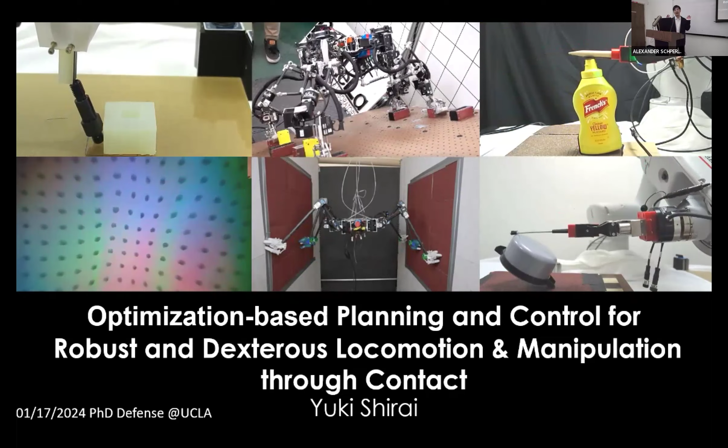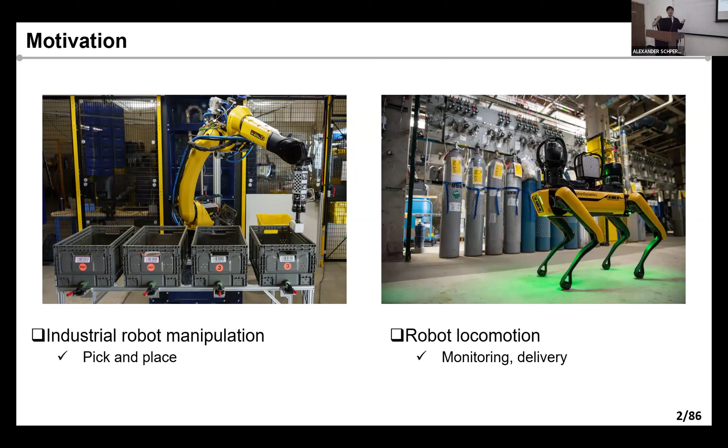Okay. So let me first get started with the motivation. Nowadays robotic manipulation has shown impressive results. For example, robotic manipulation has been used for simple tasks such as pick and place in highly structured environments such as factories. Also, robots such as Spot from Boston Dynamics have shown remarkable capability in locomotion tasks such as monitoring, delivery, and inspection. Although those robots have shown impressive results, I would say current manipulation and locomotion algorithms are still very insufficient in performance. Robotic manipulation can do great work in simple pick and place tasks, but in highly structured environments such as factories, where planner, estimator, and controller are all guaranteed to succeed. I think we want to do a bit more.

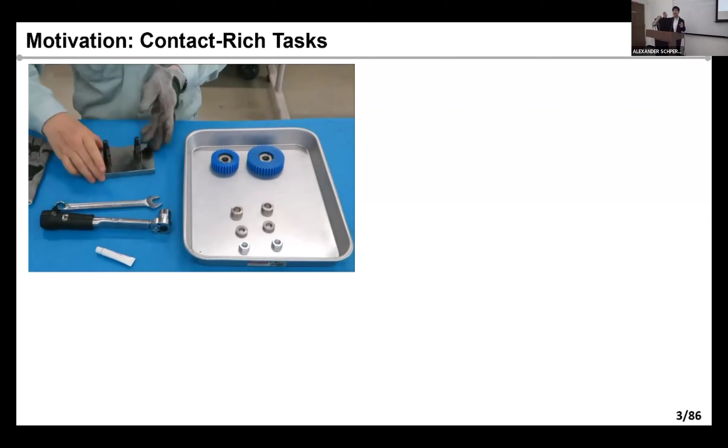In fact, we humans can achieve very dexterous tasks through contact, even under uncertainty. Here I'm showing one example of bimanual assembly of a gearbox. He understands which arm he's going to use, which arm grasps the tool, how much force he needs to apply, and what kind of motion he needs to assemble the gearbox, which is a very contact-rich task. Similarly, I cannot do free climbing, but some people can, where he understands when to make contact, when to break contact, and how much force he needs to apply to the environment to accomplish the climbing task.

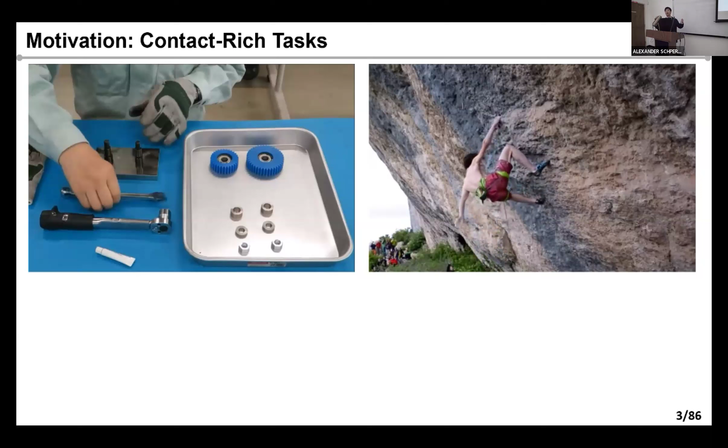What I'm trying to say here is that we humans can do very, very complex tasks through contact. And my research motivation during my PhD is: can we make robots perform very dexterous tasks as we humans can do? But of course, there are many challenges. First, planning through contact is already quite challenging.

In planning without considering contact, the contact mode sequence, such as when to make contact and when to lose contact, is fixed. It's given by users. And the optimizer is able to just focus on designing a continuous trajectory of the robot, such as the leg trajectory or body trajectory of the robot. As a result, the optimizer can potentially find a solution efficiently.

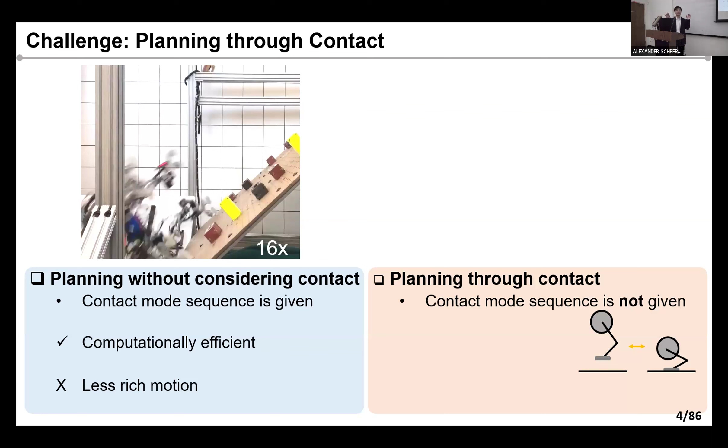In contrast, in planning through contact, the contact mode sequence, such as when to make contact and when to break contact, is not given by users. And thus the optimizer needs to figure out the appropriate contact sequence to complete its desired task. If somehow the optimizer can figure out the optimal contact sequence and we command the trajectory on the hardware, since the optimizer could successfully consider the appropriate contact dynamics, the robot can successfully achieve the climbing task for this specific demo.

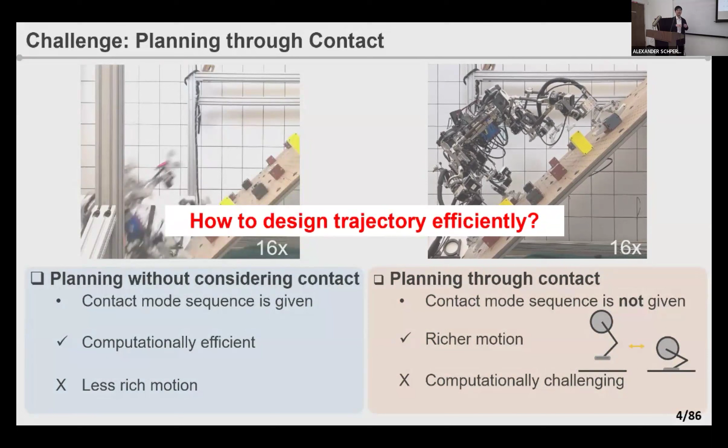Of course, there are some challenges. The key challenge is, in order to make the optimizer consider the change of contact, you often consider mixed integer constraints or complementarity constraints if you use a trajectory optimization framework. That dramatically increases the computational complexity once you have too many contacts. So the key question is how to deal with those complicated constraints, even if you have many contacts.

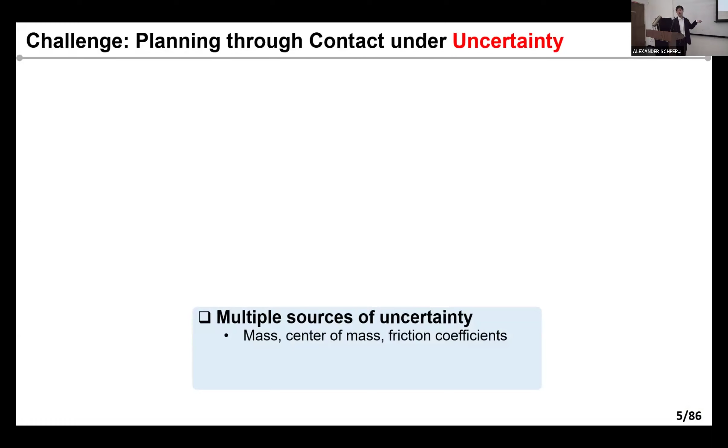Another challenge arises from uncertainty, right? In reality, uncertainty always exists, such as mass and friction of the object during manipulation. Here we want to do pivoting manipulation, where we want to reorient the object by 90 degrees. But since we couldn't do good system identification of the coefficient of friction between the object and the environment, the object loses contact. Similarly, again, because we couldn't do good system ID, the robot loses contact.

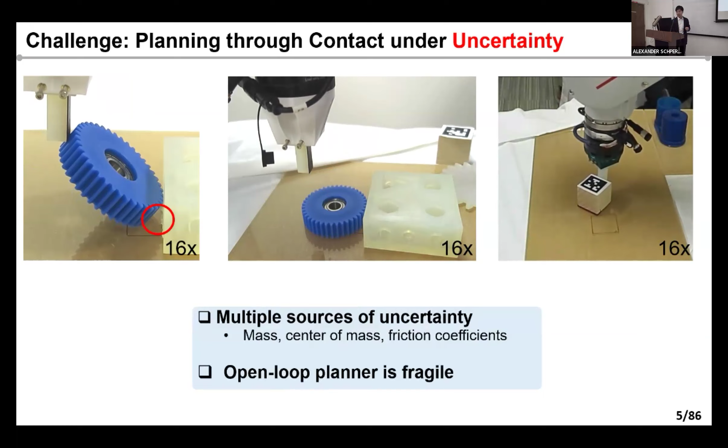Here we are trying to do pushing manipulation, where we want to bring the object from the start state to the goal state. However, even though we use a very good robot manipulator with very good position control accuracy, the robot still could not bring the object to its desired state, because we have very complicated friction dynamics between the object and the environment. So the key question is, how can we design robust optimization such that the designed trajectory will be robust against physical parameters such as mass, friction, stuff like that?

What's more, once you have too much uncertainty, maybe just using robust optimization might not be enough. And thus a closed-loop controller will be very beneficial. However, designing a closed-loop controller for a contact-rich system is in general very challenging. Here, we showcase our closed-loop controller for a tool manipulation task.

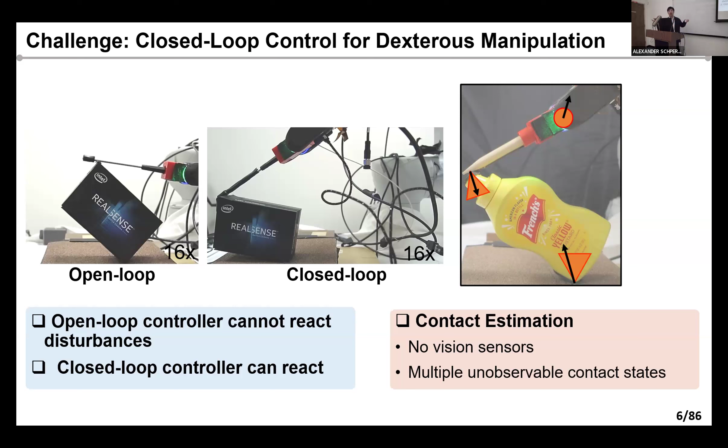We don't use any vision sensors, so we cannot estimate the pose of the object. However, even if we use vision sensors, in order to do closed-loop control, you still want to guess if contact is sticking or slipping. You also want to know how much force is happening at each contact to regulate the whole tool manipulation task. So the key question is how to estimate those contact states for this kind of complicated contact system.

So with those motivations, through my PhD, I have been focusing on those two axes. The y-axis, or vertical axis, considers whether my framework uses open-loop control or closed-loop control. When I say closed-loop control, I mean like MPC, model predictive control. My framework uses sensor measurements to replan the trajectory. In open loop, I don't replan the trajectory.

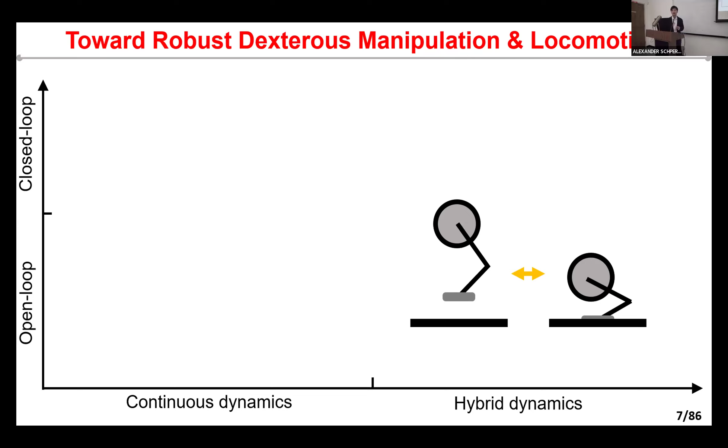The x-axis considers whether the framework considers hybrid contact dynamics or not. Hybrid contact dynamics means the framework allows the system to change contact mode. In other words, in continuous dynamics, I assume the contact mode sequence is fixed during locomotion and manipulation.

Based on those two axes, I can categorize my previous works into 4 sub-blocks. For example, I have been working on chance-constrained optimization for a vertical wall climbing robot. I also did some tool manipulation work for closed-loop control. Nowadays, I've been focusing more on hybrid optimization, considering robustness or performance for very contact-rich tasks.

Today, I don't have time to talk about one of the stochastic optimization projects I did during my PhD, but if you are interested, I'm very happy to talk offline. We did some stochastic optimization for designing feedforward and feedback gains for contact-rich systems under chance constraints. But today I would like to focus on those 3 projects.

First, I'm going to talk about our proposed distributed optimization technique so that the robot can efficiently design trajectories with multiple complicated contact constraints.

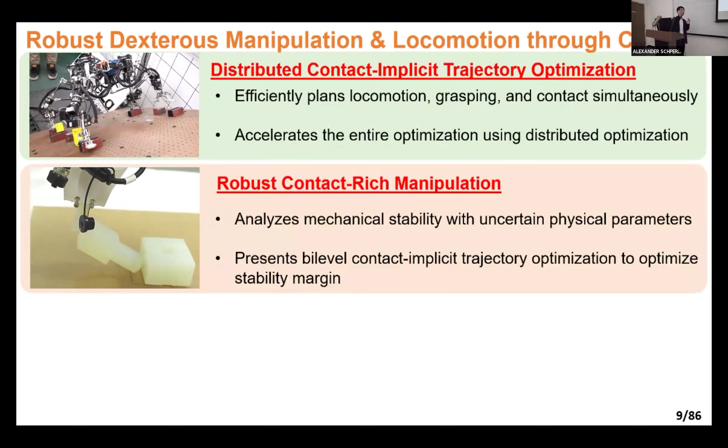Second, I'm gonna talk about our novel bilevel contact-implicit trajectory optimization, which can design an optimal controller for pivoting manipulation, as you can see, while simultaneously optimizing the worst-case stability margin during pivoting, so that the robot can do very, very robust manipulation. And finally, I'm gonna talk about our closed-loop controller using a visual tactile sensor, which is GelSlim.

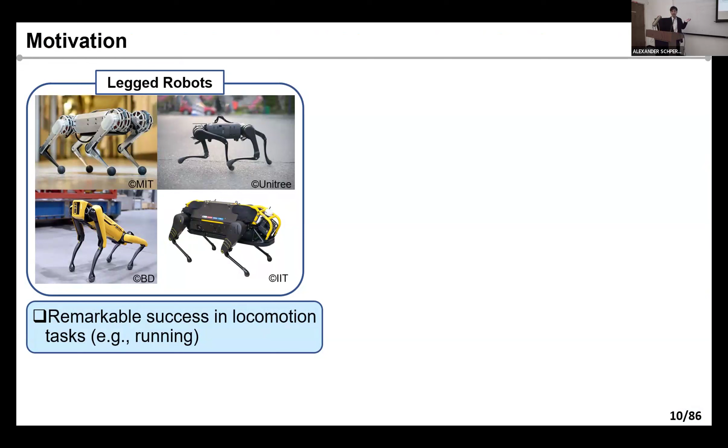Okay. So let me get started with the first chapter of this dissertation, which is planning through contact. So just for recap, legged robots have shown impressive results. What I'm trying to say here is we want to do a bit more. In order to accomplish more complicated tasks, which traditional legged robots cannot accomplish, we need to additionally consider those complicated constraints.

In this chapter, actually, we're gonna focus on the free climbing task. Although all the algorithms I'm gonna talk about today can be applied to other locomotion and manipulation tasks, here I'm gonna use our algorithm for the free climbing task because this is a challenging application.

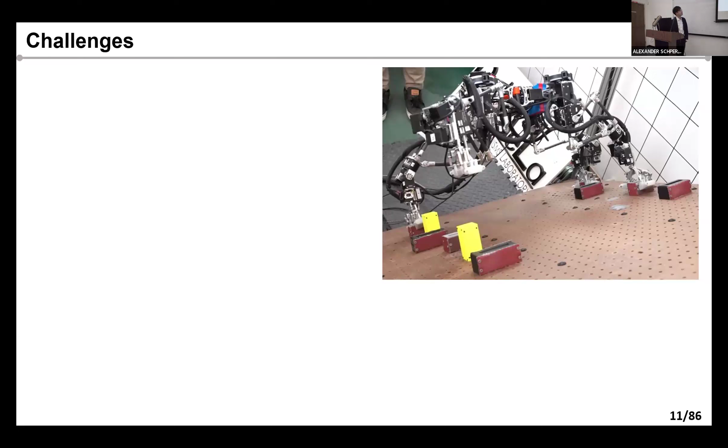So first, why is this problem challenging? Why is designing a trajectory for this free climbing robot challenging? If you use trajectory optimization, you're gonna have many different complicated constraints. For example, you need to consider dynamics and kinematics constraints of the robot, which would be nonlinear constraints because you have a bunch of sine, cosine stuff, right?

Because for this free climbing task, it's not trivial what the right optimal contact sequence is before we do climbing. So we ideally want to optimize that to figure out the right optimal contact sequence, which makes the optimizer use integer constraints to consider those discrete decisions.

Another challenge arises from the scale of the optimization problem, right? Our lab has been working on legged robots, but this is not like a traditional legged robot. We have 4 legs where each leg consists of 6 DOF, so we need to consider position and orientation of the end effector. And each leg has a 2-finger gripper, so that also introduces additional dexterity or complexity.

Also, the environment is not flat terrain, right? The environment consists of boxes for the robot to grasp for climbing. That also introduces additional complexity. So the optimization problem is very large scale with many integer constraints. So how do we design the trajectory efficiently?

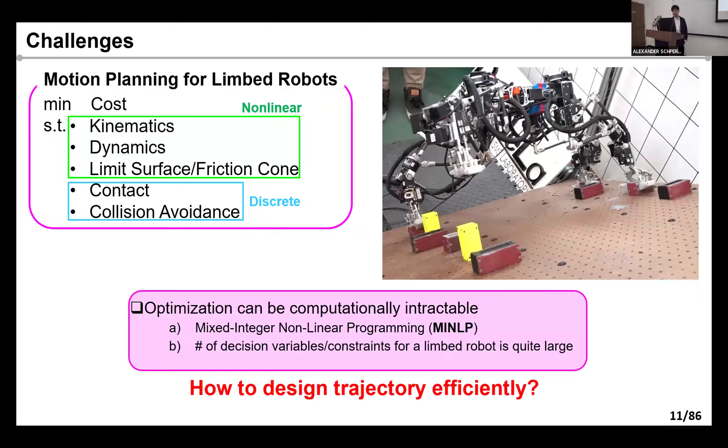Okay, so the problem statement is as follows. We want to design the optimal trajectory of finger and body pose, contact force, and contact sequence simultaneously. And we have some assumptions. For example, the robot is equipped with a 2-finger gripper, although we can consider a 3-finger or 4-finger gripper; that will just increase the complexity of the problem. And we assume that the environment consists of rigid and static convex holds. So we don't assume that those convex holds will move during locomotion.

Okay, so let me actually describe our problem formulation. This is our trajectory optimization. We have a bunch of decision variables. X is the state of the system. U is the control input for the robot. We have Z, which indicates the integer variable. And for each time step, you need to consider many different complicated constraints, right?

So first, we need to consider the dynamics of the robot. This is basically Newton's second law, right? F = ma. So we consider linear dynamics and angular dynamics of the robot to maintain stability. We consider contact force, contact moment, body position, and finger position to formulate these dynamics constraints, and angular velocity of the body. I don't think I need to explain this part because I think everybody knows Newton's equation.

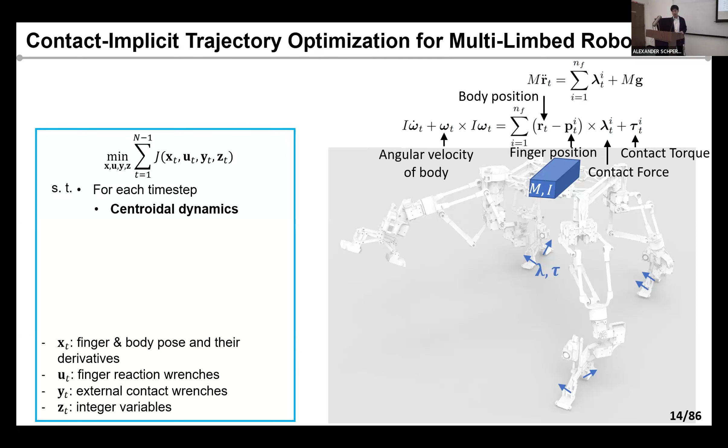And for each finger, we actually need to bound the range the finger can move, right? You cannot place the end effector anywhere. There should be some range where you can place your end effector. So we have some constraints to prevent the end effector from going outside of the workspace, which would be a function of body and finger pose, which is also formulated as nonlinear continuous constraints.

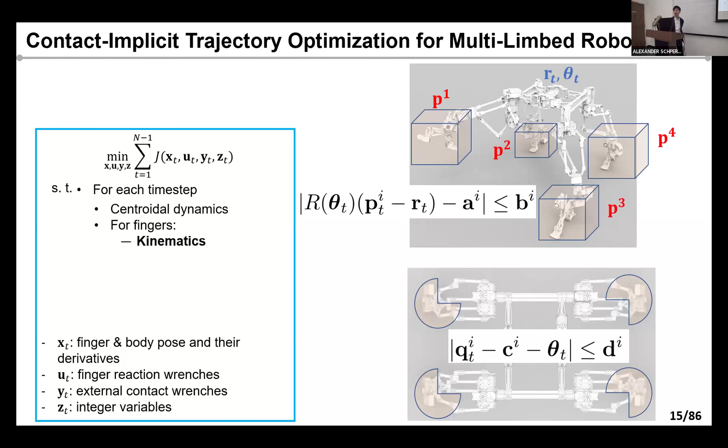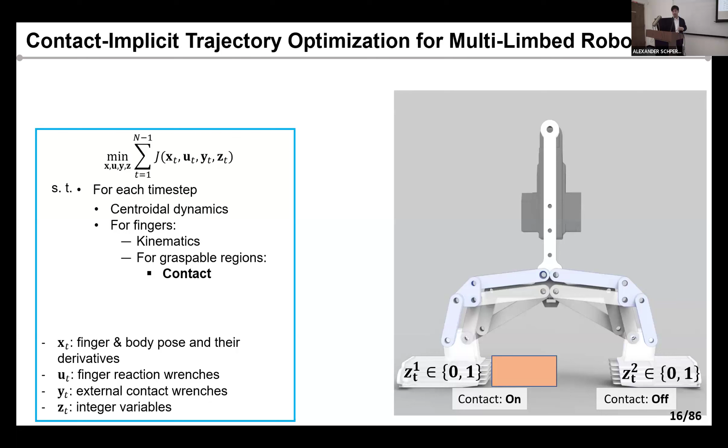And for each finger, we want to decide if the contact is making or breaking, and this requires using an integer variable. In particular, we use a big-M formulation to decide if the contact is making or breaking using integer variables. And for each contact, we consider that the force follows our proposed limit surface model.

Because we work on free climbing, we had to use a sophisticated contact model so that the robot can ensure a stable climbing task. I don't explain this part in detail. You can think we have a specific contact model to ensure sticking contact for climbing.

And we also have to consider collision avoidance constraints. This is kind of a unique constraint for this free climbing task, because for a traditional locomotion problem, I think you don't need to explicitly consider the collision constraints because we assume the environment is flat. However, as I showed, for climbing, we have an environment where we have multiple climbing holds in order for the robot to grasp to accomplish the climbing task.

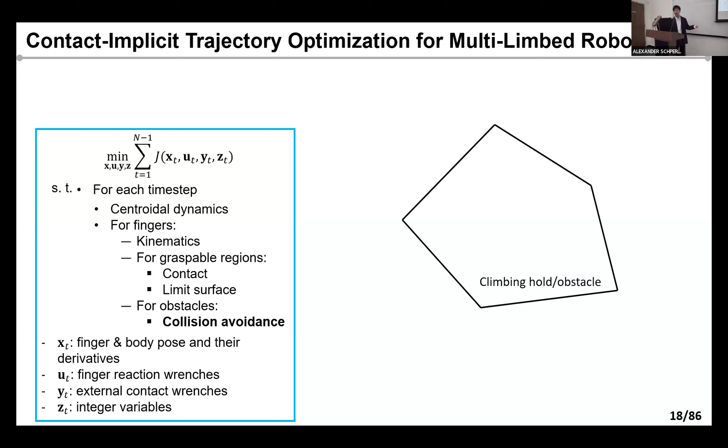If we don't consider this constraint, the robot can design a trajectory such that a finger or body can penetrate into the climbing objects, climbing holds. So we have to explicitly consider collision avoidance constraints, which also introduce integer variables. So this is the optimization problem we are interested in working on. But this optimization problem is challenging, right? We have a bunch of nonlinear and integer constraints.

So what we did was we basically utilized ADMM to decompose the optimization problem into two optimization problems. The key idea is divide and conquer. So instead of solving the original large-scale MINLP problem, we have MIQP, mixed integer quadratic programming, and NLP to solve sub-optimization problems.

Okay, how about this? I bring all the integer constraints from MINLP to MIQP, and I bring all the continuous constraints into NLP, and I solve each optimization problem separately, right? If you solve the optimization problems separately, you're gonna get solutions X star and Y star from MIQP and NLP respectively.

Ideally, if X star is equivalent to Y star, what does it mean? If those two solutions are identical, it means the solution X star and Y star satisfy all constraints from MIQP and NLP. This is a very important part I want to talk about in the first part. So do you see? If X star and Y star are equal, we satisfy all the constraints from MIQP and NLP, which means we indirectly solve the original MINLP problem. So that's what we did.

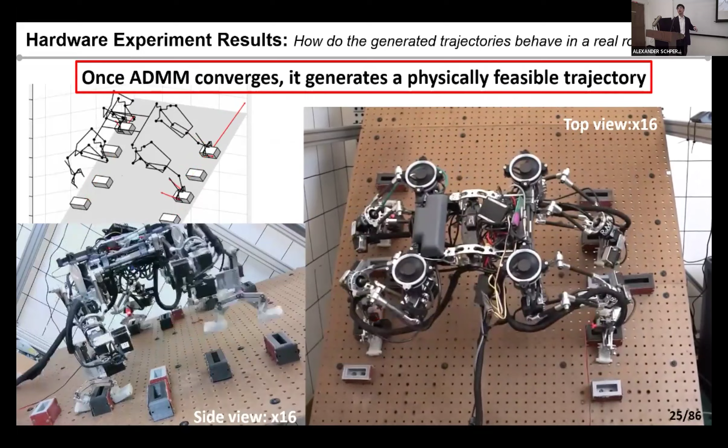Successfully, meaning you get consensus? Consensus in optimization. Yeah, that's true. Even though we achieve consensus, it doesn't necessarily mean the hardware experiment works. But when I say success, it means the optimizer converges. And fortunately for this specific demo, the hardware experiment also works.

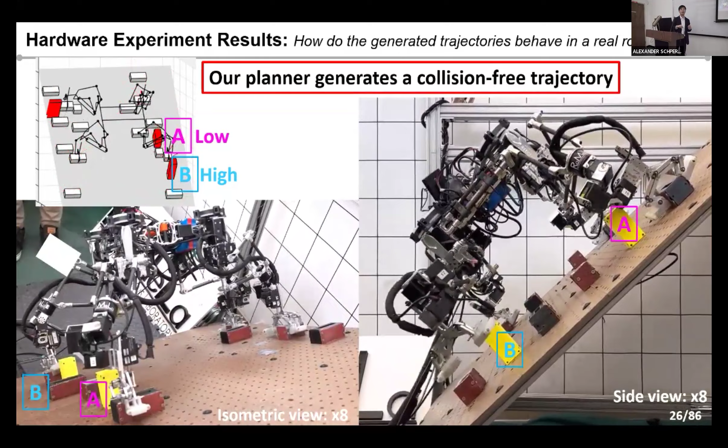So this is a case where we have obstacles. You can think of those yellow boxes as representing obstacles. In our setting, the optimizer thinks the height of obstacle A is low, so the robot just steps over the obstacle. However, for object B, the optimizer thinks its height is high, so the robot takes a detour to avoid collision. And you can observe these rich, different trajectories by considering kinematics, collision, and contact simultaneously.

Okay, that's the first chapter of my presentation. So may I ask a question? Yeah. So in the previous experiment that you showed, is the environment well defined and all the optimization is done offline or it's done online? And in case something will go wrong, meaning something will slip, how would the system perceive it and adapt for it? That's a great point.

Thanks. So to answer your question, first, all the computation happens offline. We exactly know the environment. We know how much friction we have on the environment. We know the orientation and position of the climbing hold location. We know everything exactly beforehand. And during the hardware experiment, yes, if some mismatch happens, the robot fails. But the thing is, this is open loop control, and we did not discuss any robustness.

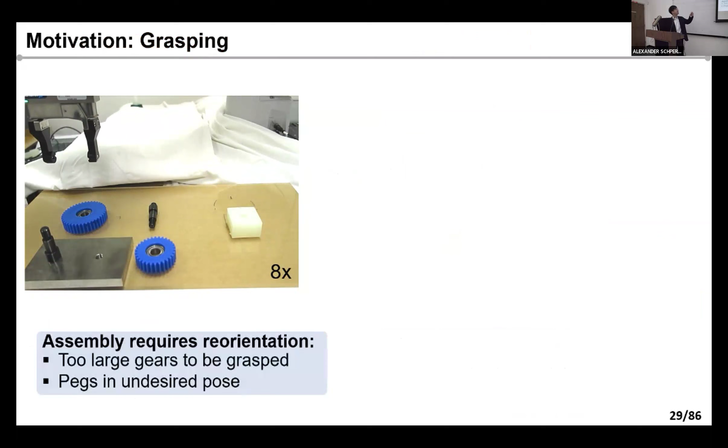Okay. So let me move on to the robust planning part. Here I would like to motivate why pivoting manipulation is fun or challenging. We want to do an assembly task where the object might be too large for the gripper to grasp. Similarly, if the peg is not in the desired pose, the robot cannot grasp with a good configuration, and thus fails to insert. So our motivation is, can we first reorient parts so the robot can grasp? In other words, we first do pivoting and then grasping.

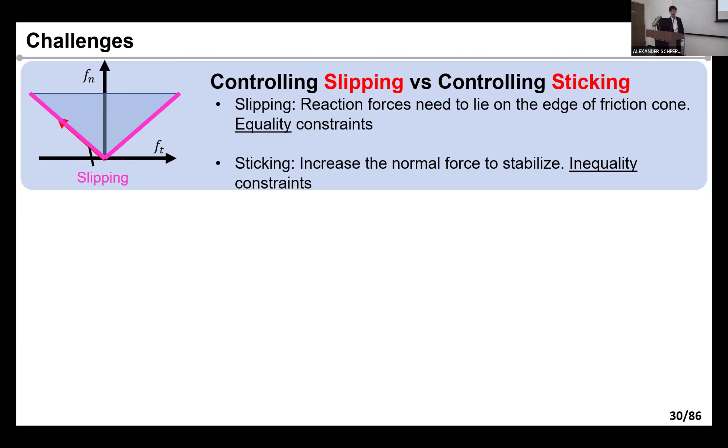So in slipping control, we need to make the friction force lie on the edge of the friction cone, which is very challenging because this is an equality constraint. You need to simultaneously increase normal force and shear force together to ensure the force is on the edge of the friction cone. This makes it much more difficult for robust optimization to find a solution.

In traditional robust optimization, our goal is to find optimal control input U to satisfy inequality constraints for all realizations of uncertainty. But here, because slipping contact is an equality constraint, we cannot find U to satisfy all uncertainty realizations. If the object mass is 10 kilograms, 8 kilograms, or 100 grams, you cannot find a control input U that works for all of them with slipping contact.

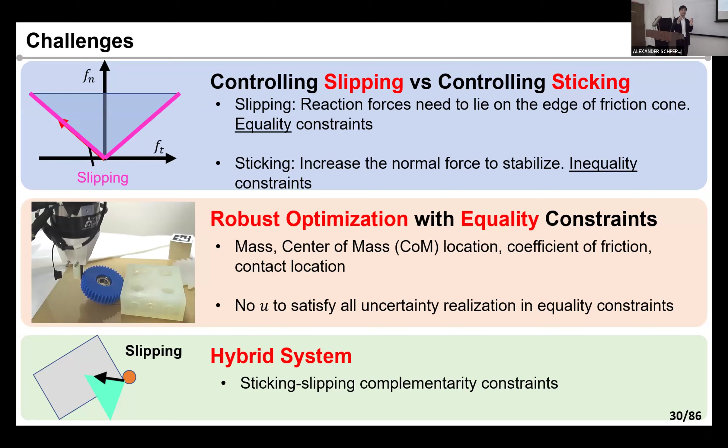What's more, during manipulation, we observe that if the robot contact does not move, the robot cannot complete its pivoting task. Thus we realize that actively controlling contact location is critically important. To do that, we need to consider sticking-slipping hybrid contact dynamics so the robot can change contact state from sticking to slipping and vice versa, which can be realized with complementarity constraints.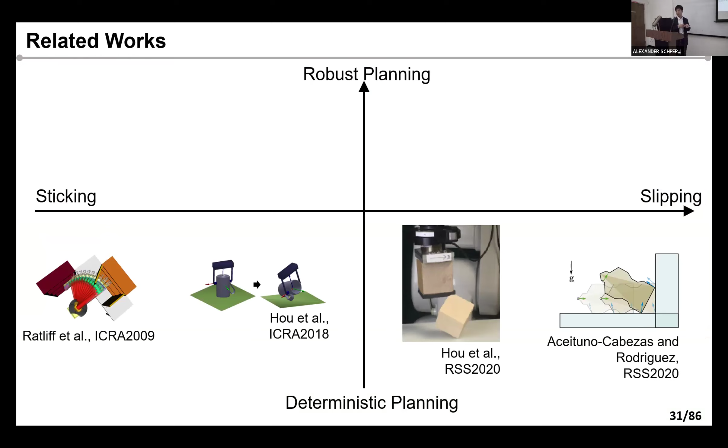There are many great related works. Those works achieve some deterministic planning with sticking contact. Some work from CMU and MIT did some great slipping contact manipulation. Those works could achieve some locomotion with some robust optimization. And what we are proposing is we can do robust planning with slipping contact.

Okay. So the problem statement is as follows. We want to design an open loop controller for pivoting manipulation with 2 extrinsic contacts and 1 contact from a robot. And we can formulate a trajectory optimization problem like this, nonlinear programming with complementarity constraints, where we have X, U, F as state, control input, and extrinsic contact force decision variables. So we consider object angle, finger contact location, contact force from the robot to the object, and extrinsic contact force as decision variables. So by solving this optimization problem, you can find the optimal control input.

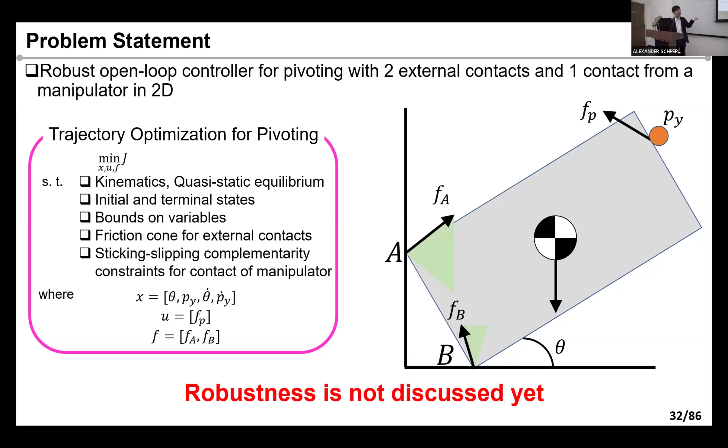But I didn't talk about how to incorporate robustness, which I'm gonna talk about. So the key insight is friction can compensate for uncertainty. That's the key message I want to talk about in this chapter. So let's consider the case where the mass of the object is lighter than what you estimated. If the weight is lighter than what you estimated, friction forces can adjust to maintain stability of the object. If you command the robot for pivoting manipulation, even though you don't change anything, even though you use an incorrect parameter, to some extent, the robot can still achieve pivoting manipulation because friction can compensate for that noise, uncertainty.

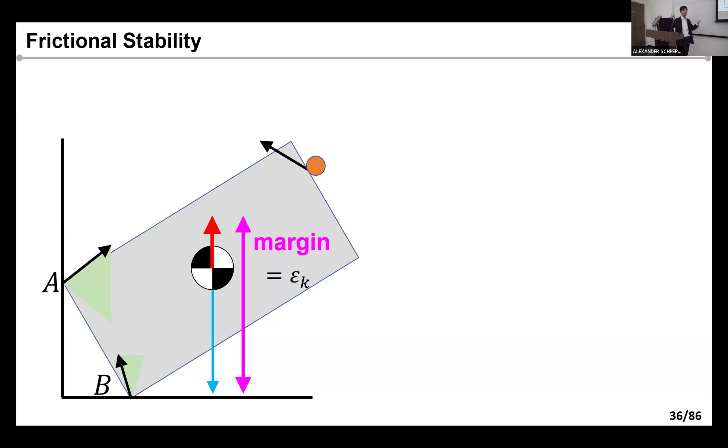Similarly, if the weight of the object is heavier than what you estimated, again, to some extent, friction forces can adjust to maintain stability of the object. So we call this range where friction can still compensate for uncertainty the frictional stability margin. As you can imagine, this frictional stability margin should change along the trajectory. This stability margin is a function of the trajectory of the robot, object, and contact forces. So what we are interested in is designing a controller which can improve this stability margin.

Okay, so we have the time history of the stability margin. The x-axis represents time and the y-axis represents stability margin. And we want to know the upper bound and lower bound of the stability margin to do some robust optimization. In order to know them, we use linear programming to get the upper bound and lower bound. Once you get the time history of the stability margin, you can solve another optimization problem to design an open loop controller which can improve the worst case stability margin. I basically did some min-max optimization to improve the worst case stability margin.

Once we solve the optimization problem, now you're gonna have a new control input. Because we want to improve the worst case, we design the optimization problem such that it's gonna improve the worst case stability margin. So that means now you have a new trajectory, and the stability margin is a function of the trajectory of the robot, object, and contact forces. Now the stability margin should also be updated because the trajectory from the robot is different. And we can keep iteratively solving those two optimization problems again and again until we have a better controller.

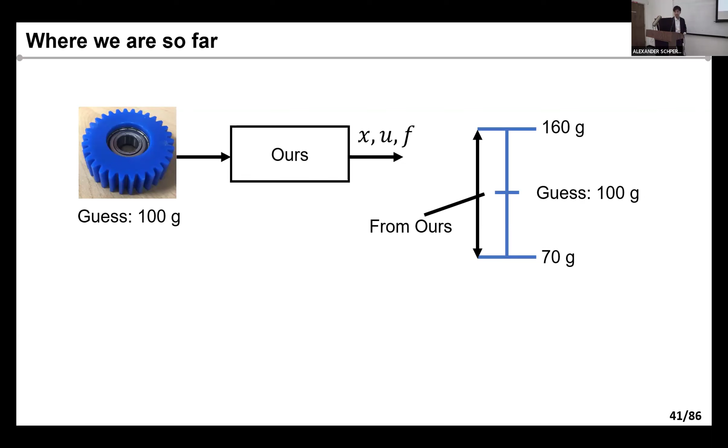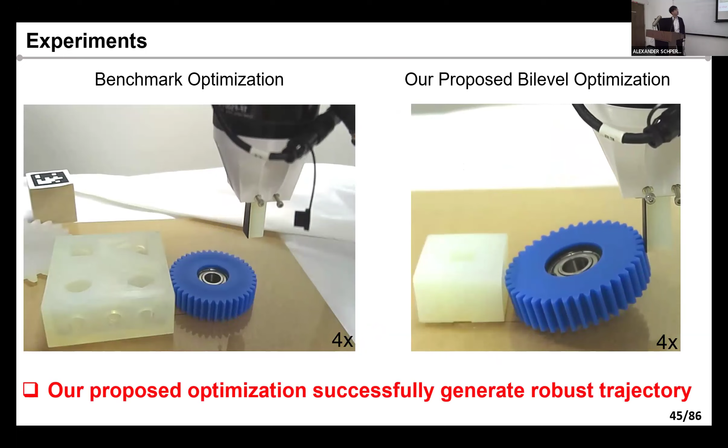Okay, so we did some experiments in hardware. I'm gonna first show some robustness experiments. We intentionally use an incorrect parameter as input of the optimization problem. Here, I assume the mass of this blue gear is 100 grams, although the true mass is 140 grams. If the framework is really robust, we can still achieve pivoting manipulation. And this is the result. The benchmark is a method where we don't consider frictional stability margin, just a traditional trajectory optimization problem. If we use our optimization problem for each different incorrect mass parameter, we can do pivoting manipulation. And these are some results of hardware experiments. So we can do pivoting for different objects, as you can see here.

Since our algorithm is general, we can do pivoting manipulation for different objects, as you can see here. Okay. So what's the limitation of this work? We did not consider the case where object shape is non-convex, something like this peg. Why don't we consider this kind of object?

The reason is that now contact location can change during manipulation. So for this peg, until t equals t1, contact is always happening at those orange dots, right? However, after t equals t1, contact location will be on those green dots. So that means contact mode change: contact location changes before and after t equals t1.

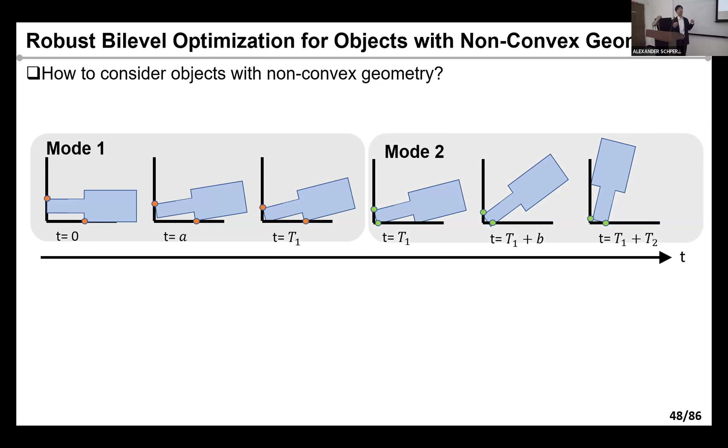So what we did was, okay, let's give up doing stability margin optimization over contact mode. But can we at least optimize the contact mode duration, how much time each contact mode spends? That's what we did. One assumption is we still know contact mode 1 happens at orange; we assume the contact mode sequence is given. First, we identify what constraints are used for each contact mode: F1 is for contact mode 1, F2 for contact mode 2.

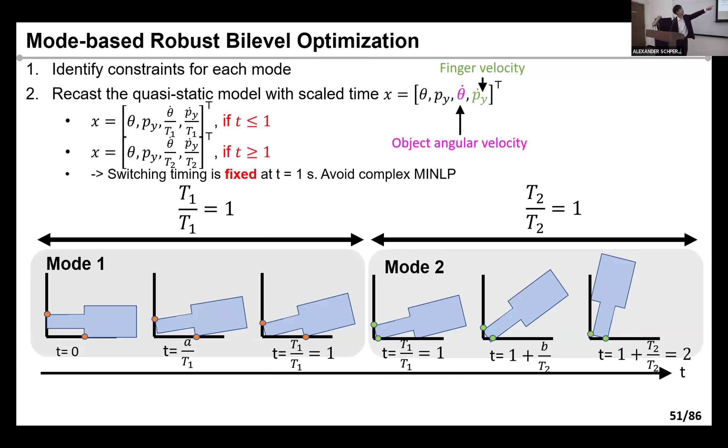Previously, we didn't know when the contact mode switches because T1 and T2 are decision variables. This kind of technique has been used in the optimization community for many years, so I just utilized it. By doing normalization, now we know exactly that at t equals 1 second the contact mode switches, and we can now do robust optimization for this kind of peg.

So this is my favorite video. This peg is actually heavy, and the geometry of this peg is super non-convex. But still, our optimizer is able to design a robust trajectory, and in hardware experiments it works well. Okay, so that's the second part of my presentation. Then I'm gonna talk about my final part.

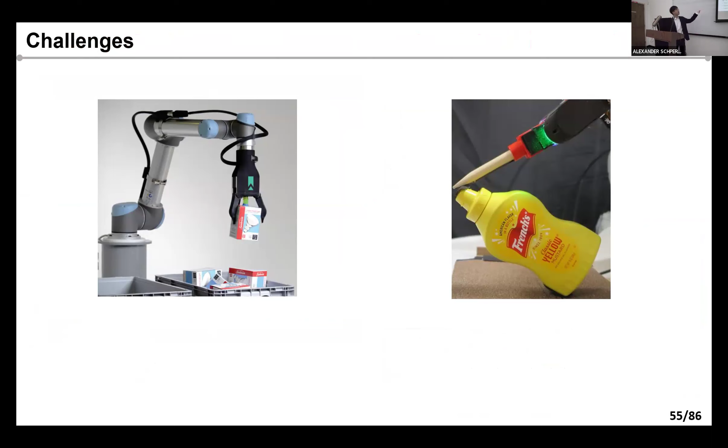Okay, so let me briefly motivate why tool manipulation is challenging. For the traditional grasping problem, we can often assume that the robot is making 2-point contact. If you use a 3-finger or 4-finger gripper, maybe the number of contacts increases. But at least the manipulator can directly grasp the object. Also, this is inherently stable. The robot can increase normal force at the fingertip to robustify manipulation.

In tool manipulation, on the other hand, you have multiple contacts. That makes the design of the planner, estimator, and controller quite challenging. Also, this is manipulation of one object using another object, right? You cannot directly manipulate this yellow mustard bottle. To interact with it, you first need to use another object, the tool, which introduces more complexity.

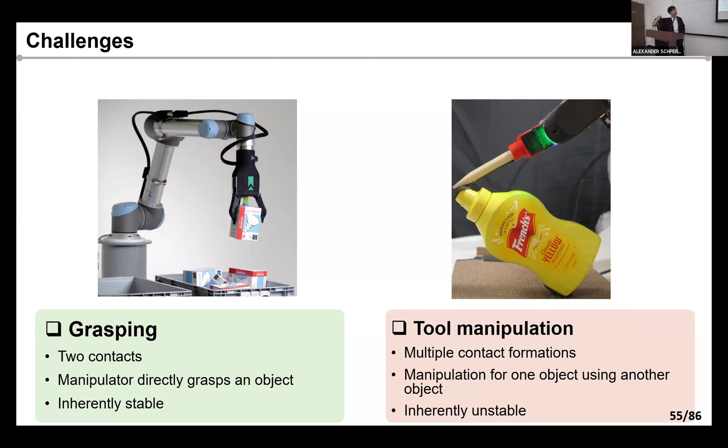This is inherently unstable manipulation, right? We don't know the right direction for the robot to move the tool to stabilize manipulation. So that's quite a challenging problem. The mechanics is already quite complicated, and contact estimation is also very challenging, as I mentioned at the beginning of this presentation.

Okay, so there are many great works in this field. Those works achieve some open loop tool manipulation. Those works, especially from Alberto's group at MIT, have shown impressive results in using force and visual tactile sensing. And our work can also do closed loop control using visual tactile sensing for tool manipulation.

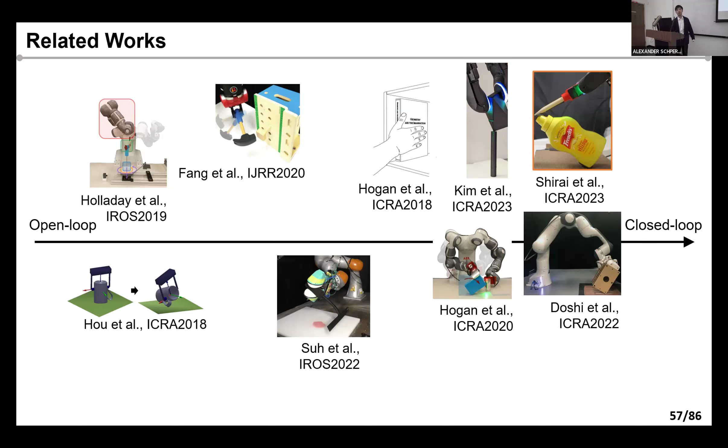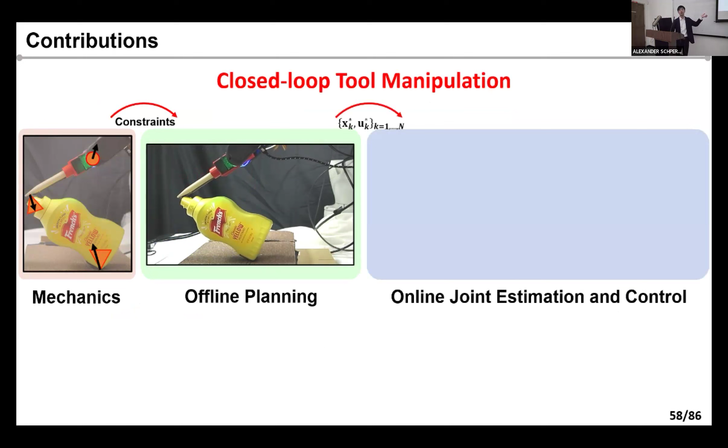So let me briefly explain the contribution here. First, we're gonna identify the contact mechanics for tool manipulation, which provides the constraints to the motion planner to simultaneously design end effector, tool, and object trajectory. Using this trajectory computed offline, we do closed loop control.

So under unexpected contact events, the visual tactile sensor is able to detect slipping. And using this slipping information, our proposed tactile estimator is able to estimate the pose of the object and tool simultaneously. And using this estimate, our MPC-based controller is able to track the reference trajectory.

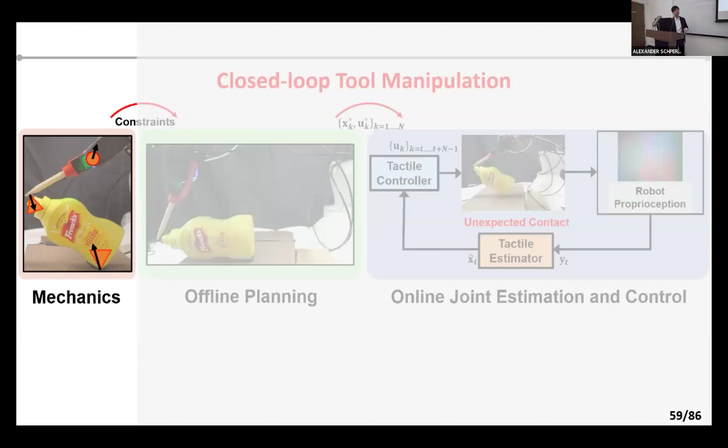Okay. So let me first briefly explain mechanics. So we want to do pivoting again using an external tool. And we have some assumptions. For example, we assume that the object and the environment are rigid. We also assume dynamics is quasi-static, so we don't consider acceleration. Also, we assume that the kinematic geometry of the tool is known. We also assume friction coefficients are known.

We consider manipulation in 2D, as you can see here. So we don't consider 3D manipulation directly. So those are the assumptions I have in this work. In other words, I do not assume that the following parameters are known. So I don't know the length of the object. I don't know the global contact location of the object. I also don't know the angle of the object and actually the tool.

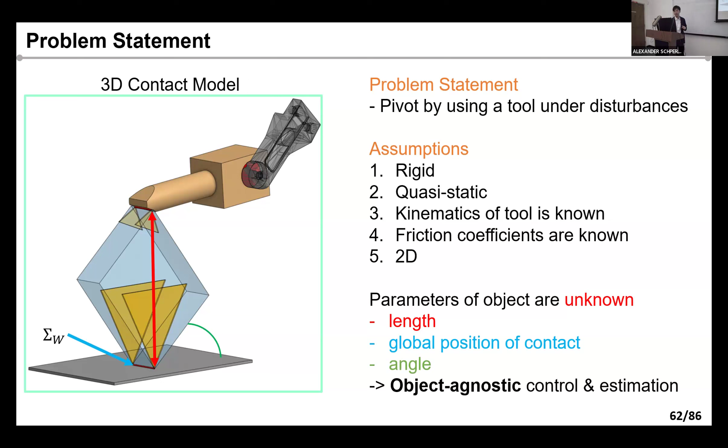So our framework wants to do closed loop control while simultaneously estimating those parameters, which would become an object agnostic manipulation framework. Okay, so now I'm gonna talk about mechanics. I have to consider some constraints to achieve tool manipulation. So we consider force and moment equilibrium of object and tool. We also consider friction constraints to ensure sticking contact at each different contact location.

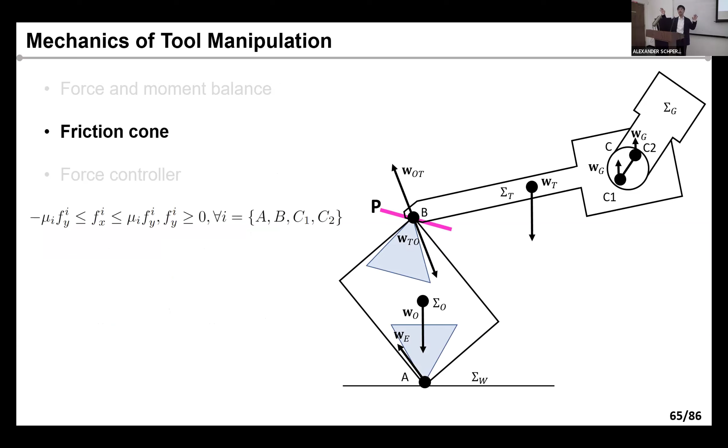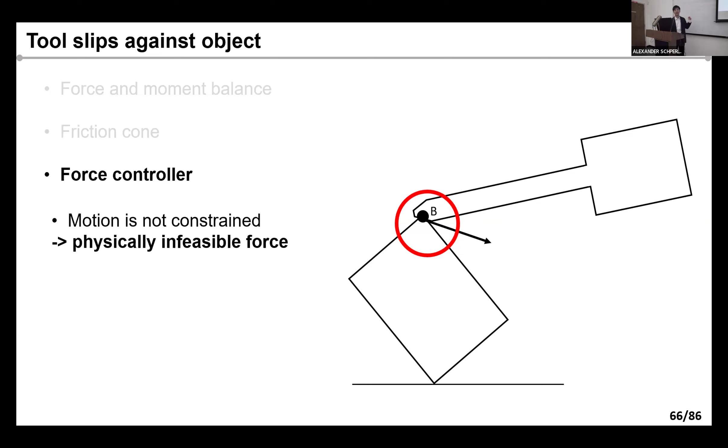What I mean is, in order to get reaction force, your motion needs to be constrained, right? If you want to get this reaction force along this axis, motion along this axis needs to be constrained. This is a very basic part, but once the problem becomes very complicated, you need to explicitly consider this kind of detailed constraint. So in fact, we ensured that the motion associated with the force will be bounded or constrained, so that the force will be physically generated. Okay, so that's the mechanics.

Let's see how much time I have, 43 minutes.

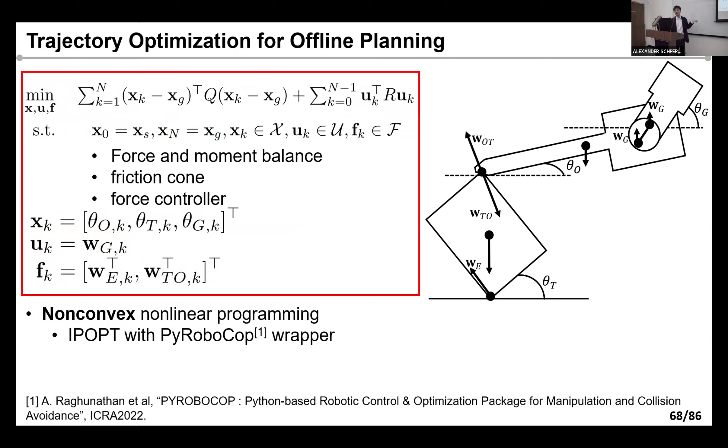Okay. So the planning part is not so complicated. We just use a nonlinear optimization problem where we have object angle, tool angle, and end effector angle as state. And we just use IPOPT to find solutions. That's it. Okay. So finally, I'm gonna talk about our framework for closed loop control.

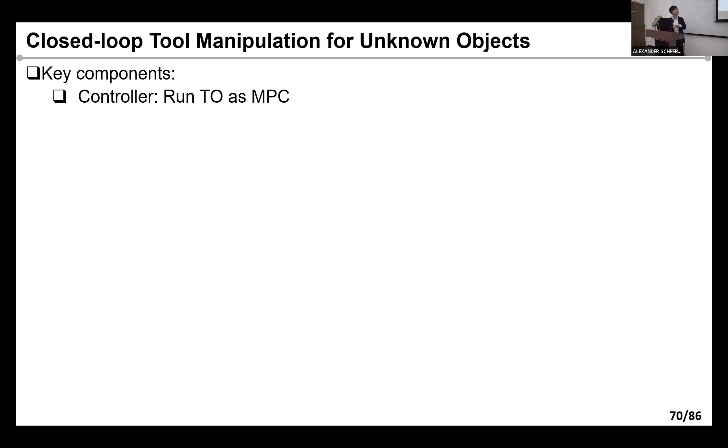In order to do closed loop, you need to have a controller and an estimator, right? For the controller, we didn't do any fancy stuff. We just use the optimization problem I described in the previous slide in receding horizon fashion. That's it. So the key challenge arises from the estimator part. Again, we want to estimate the following parameters: contact location of the object, length of the object, and current angle of the object. How to do that? We don't do Kalman filter, stuff like that.

The key strategy is we can use two equations representing the same location and do least squares. This is a very simple idea, but it works pretty well in hardware experiments. So let's use forward kinematics. We want to represent contact location PB using homogeneous transformation matrices. From world frame to frame A, and from frame A to frame B, we can use these homogeneous transformation matrices, which are functions of the unknown parameters we want to estimate.

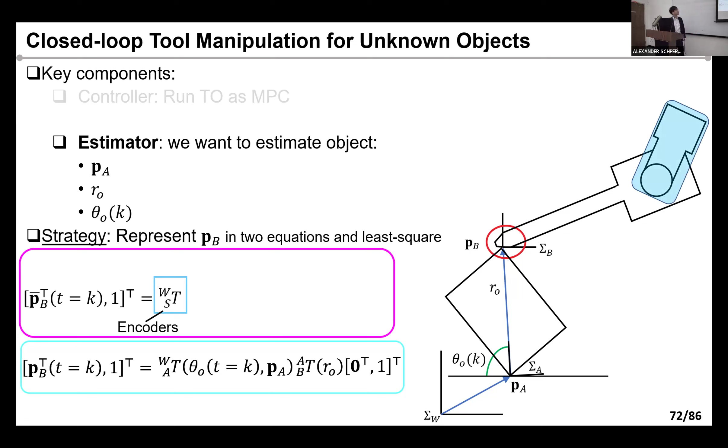Similarly, we can represent point PB using forward kinematics, which are a function of sensor measurements from joint encoders and the visual tactile sensor, which is attached to the fingertip. Now we have two equations representing the same location, so we can do least squares to get an estimate of those parameters.

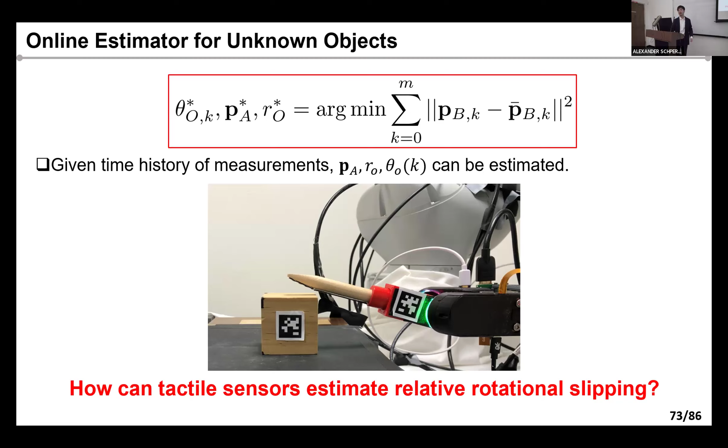That's it. I actually skipped one detail in the previous slide, which is how to convert visual tactile sensing information to get the relative angle between the end effector and tool, which I'm going to briefly talk about now. In this project, we use GelSlim from MIT, which is covered with deformable skin with many black markers. By getting a bunch of tactile images, you can compute optical flow, or you can get the deformation, how much each marker moves.

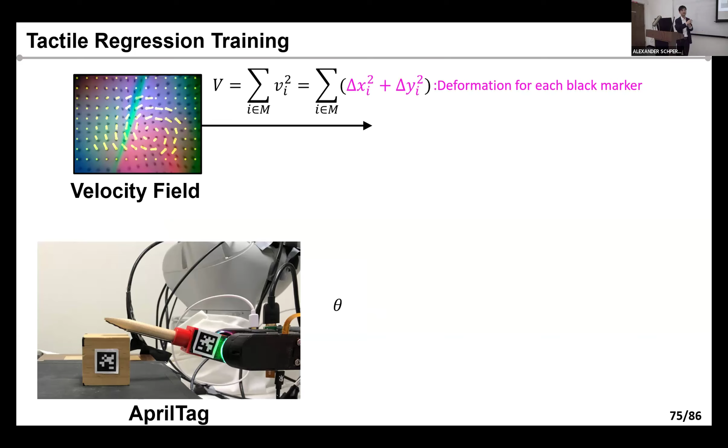Once you know how much each marker moves, I used a vision sensor to get the ground truth of the angle of the tool with respect to the end effector, and I just did a polynomial fitting. This is the training phase. In hardware experiments, in actual implementation, we didn't use AprilTag. We did this kind of training to train a module so that visual tactile sensor information can be converted into the relative angle between the tool and the end effector.

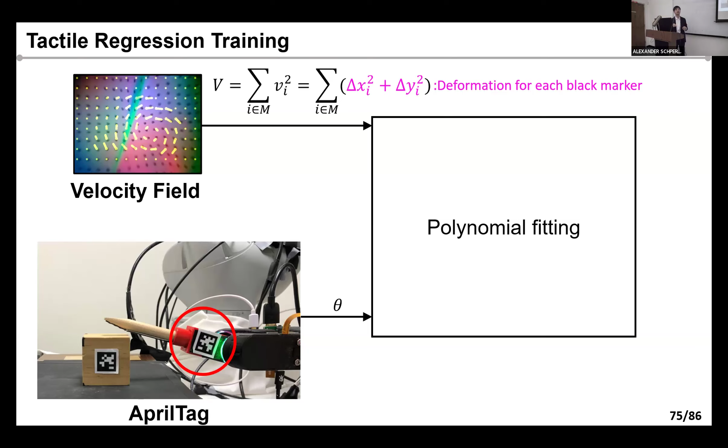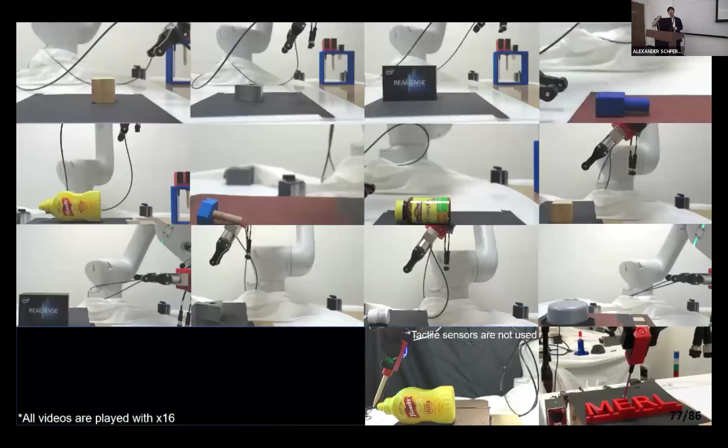Now I'm going to show experiments. Let me first show the results of the open loop controller. No feedback, just open loop. But since our optimizer considers all the complicated constraints, it can design trajectories for this kind of complicated tool manipulation. And since our algorithm is general, we can do tool manipulation for different object tool pairs on different contact surfaces, as you can see.

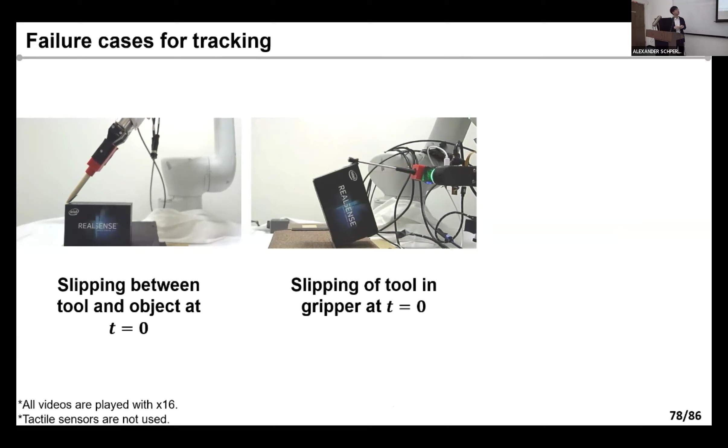But of course, there are some cases where open loop fails. First, sometimes the tool can miss the contact at t equals 0. Also, we observe that the tool can rotate in the gripper, and thus the tool eventually loses contact with the object. Also, if I add some disturbances, unfortunately, it does not work.

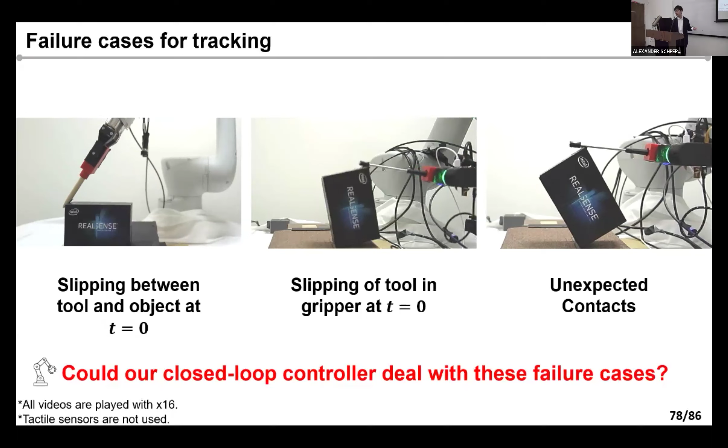In closed loop control, it can respond to the sensor measurements and still maintain the stability of the object, and thus some of the assumptions of the tactile estimator are still maintained. In contrast, open loop doesn't do any feedback, so as time goes, noise accumulates, and eventually the robot loses contact and the tactile estimator diverges.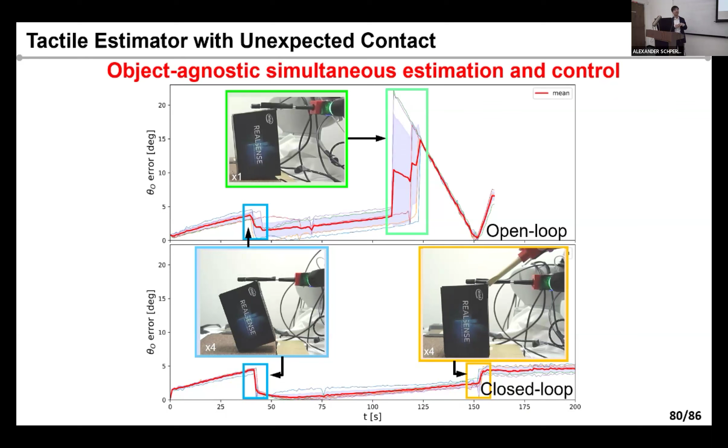So finally, I would like to conclude this presentation with some key takeaways. First, planning through contact is very challenging, especially in terms of computational complexity, but I think distributed optimization techniques such as ADMM would be useful to achieve better computational complexity. Second, incorporating robustness is very, very important to achieve robust manipulation, especially with extrinsic contact.

And I think I showed understanding contact mechanics is very important. If you don't understand the underlying mechanics, how can you robustify manipulation? That's my message. In particular, I proposed model-based optimization which can achieve robust manipulation efficiently and intuitively. I didn't show computation results, but at most it took about 2 minutes to find the bilevel optimization solution. That's not that bad, I would say.

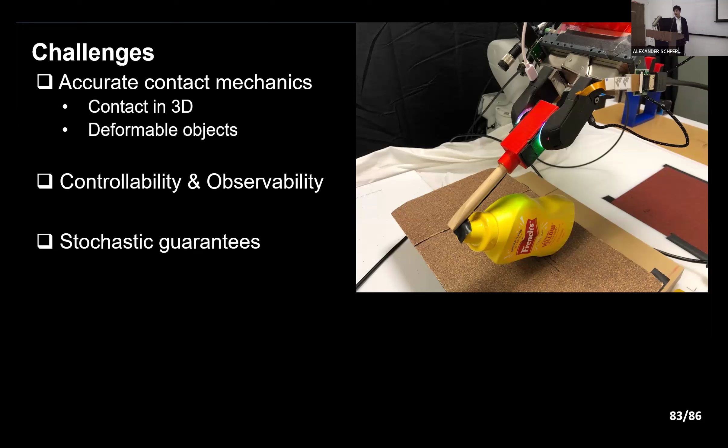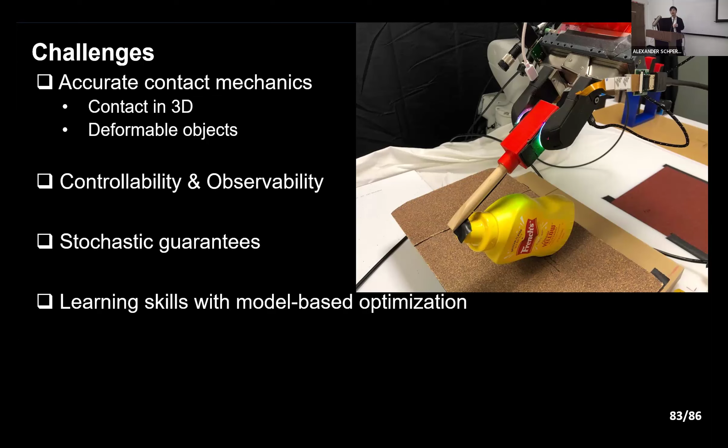Okay. And also nowadays, reinforcement learning or machine learning has shown impressive results. For example, the reinforcement learning algorithm from Marco Hutter's group at ETH has shown impressive results. Because we have very good model-based optimization techniques, maybe we can utilize our model-based optimization to warm start learning skills so that we can achieve more robust tasks for locomotion and manipulation. Okay, so that's pretty much it.

So I would like to conclude this presentation by saying thank you to everyone. Especially I would like to say thank you to Professor Dennis Hong. He has been my advisor over the last 5 years. And he's very great. He gives me all the feedback, also in my career, non-research stuff. So that's very appreciated. Thanks to him, I could enjoy my fun, but sometimes tough PhD journey. So I really appreciate his kind feedback and great personality.

So I'm very happy. And during my PhD, I was very fortunate to have internship positions at MERL, Mitsubishi Electric Research Lab, and BDAI. I want to say thank you to Pan, JW from BDAI, and Devesh, Arvind, Diego from MERL. In particular, Devesh, Arvind, and Diego, because some manipulation work I presented was a collaboration with MERL. So I really appreciate their kind feedback and infinite passion for manipulation.

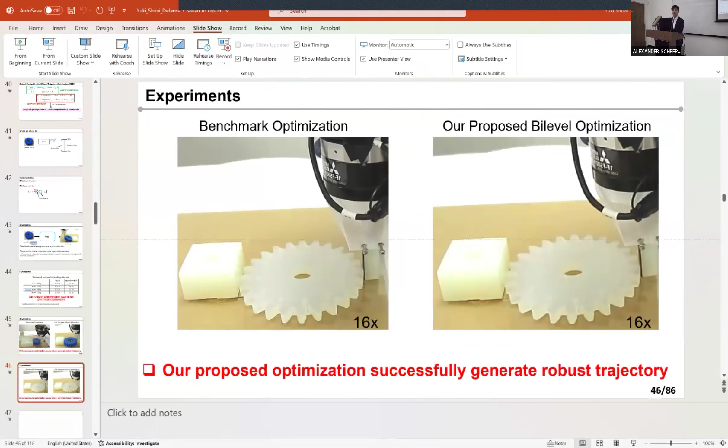So the first one is, when you say normalize the time phase, does the optimizer still estimate or make predictions of when the contact happens? Yuki, for the Zoom people, we cannot hear the question. If you can very briefly restate the question for us, that would be great. I see. So Shen just asked if the optimizer knows contact. Like the contacts change. You do MPC, so you make predictions of when the next contact is. So when you normalize, does the MPC or the controller still do that?

So Shen asked if our framework predicts the contact location, especially in an MPC setting. First of all, we did just planning, and for this planning we can assume that the contact location does not change during manipulation, so we didn't do such a prediction. But I think that's a great point. If we want to do MPC, as I mentioned in the closed loop control part, we need to do some estimation, so we need to have such a module. And you said you have another question.

So I was wondering, in principle you can design the estimator and the controller separately. When the system is more complicated, can you still do that? So Shen asked a very great question. In a traditional linear dynamical system, we can design the controller and observer separately, but can we still separately design them? Can we still study controllability and observability decoupled or not? That's a great point. I didn't think carefully, but my intuition is, maybe no.

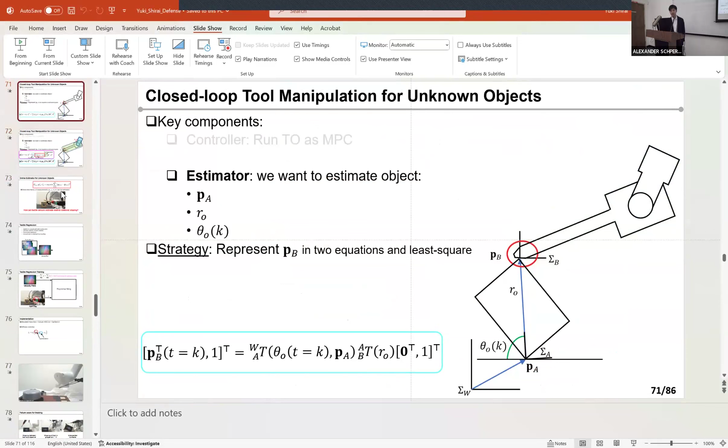I'm not familiar with the visual tactile sensing tool. That is a gel, I guess. Where is this gel implemented in your test bench, and what parameters is the tool measuring? I see. We did not manufacture it in our lab. This is a collaboration from when I was doing an internship at MERL, Mitsubishi Electric Research Lab, which has been collaborating with Professor Alberto Rodriguez's group at MIT, where they manufacture this kind of GelSlim. So I don't know the super technical details about the parameters, but we used a very similar GelSlim during manipulation.

I don't know if I'm answering your question. What's your question again? So which part is the gel implemented in, in your last video test bench? I see. It is attached to the fingertip of the robot finger.

I see. So then it can measure the deformation of the gel so that the robot can estimate the torque at that joint. So yeah, that's a good point. I was very rushed, I did not explain so much detail. So what we did was, each gel is covered with black markers, and we can estimate how much the markers move. And using this information, we did some polynomial curve fitting. So I would say the simplest way to do some machine learning or some system identification.

So we basically get optical flow. It does not give you any torque, but I know some papers from Alberto's group where they did some estimation of how much torque is happening from this velocity field. For this project, we did the simplest stuff. We just measure how much each black marker moves, check how much the ground truth is moving, rotating, and we did some polynomial fitting.

So in this experiment, you are using this tool to measure how much angle is rotated at this joint? Exactly. We want to estimate how much the tool rotates with respect to the gripper. With respect to the gripper. I mean, is it possible to use a very simple angular encoder instead of this gel? I see, I think that's a good point. For this specific task, maybe you can use such a sensor to estimate the relative angle.

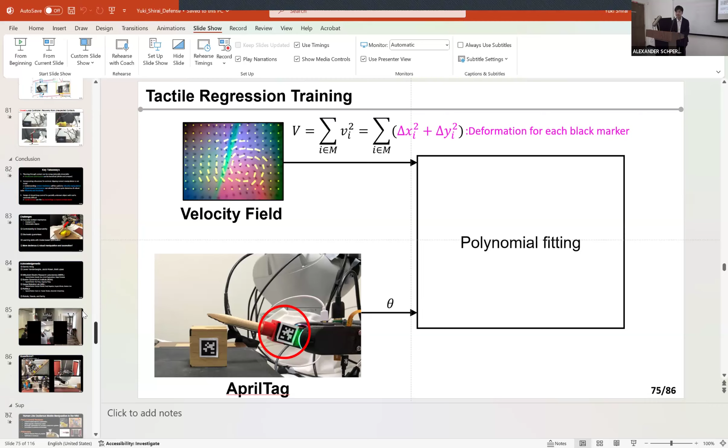I like your approach to developing a framework for object agnostic manipulation. So a couple questions about what you're controlling. Are you controlling the grip force at all, or just observing what the sensor tells you about relative orientation between tool and end effector? I see. So the question is how the control looks for tool manipulation. For grasping force, the normal force, I use exactly the same force during manipulation. But for stiffness control, I still command force on this plane.

So you control it in the pivot plane? Exactly. Not directly, but I still control the contact force at the fingertip, not the tooltip, on this pivoting plane. And I noticed there's sandpaper between the object and the support surface, and tape between the tooltip and the object. So are you controlling the kinematics of the tooltip, or are you inferring a force at the tip?

So we are actually running a stiffness controller at the end effector of the robot finger. And because we know the tool geometry, we can propagate contact force from the fingertip to the tooltip. So we are indirectly doing stiffness control also at the tooltip. So we are doing not only kinematics control, but also quasi-static force control at the tooltip. I don't know if I'm answering.

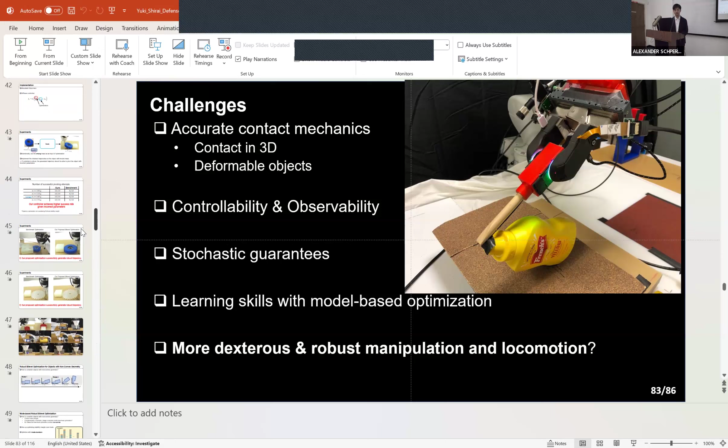Did you look at the connections between what you're proposing and what exists in terms of the tube MPC literature? I'm curious to hear. That's a great point. So actually, I'm a big fan of the tube MPC framework. We actually wanted to do something like that.

The key challenge is, let me know if I'm wrong, but as far as I understand, in order to do tube MPC, we want to estimate the reachability of the dynamics. And I think formally discussing reachability of the dynamics for this kind of contact system is quite challenging. So that's why we didn't do that. But actually, when we had the first meeting among the collaborators, doing tube MPC was one of the most powerful candidates that I want to do in the future if I can somehow estimate the reachability.

But so then are you computing these margins? Is this an output of the optimization? Output of the optimization problem. Okay. Yeah. So that's the interesting part. We are not providing the margin to the optimization. It's not input, it's output, the stability margin. So this might be a simple picture, but what we are saying is that our approach, given a nominal guess of the parameter, can provide some upper bound and lower bound of the parameter.

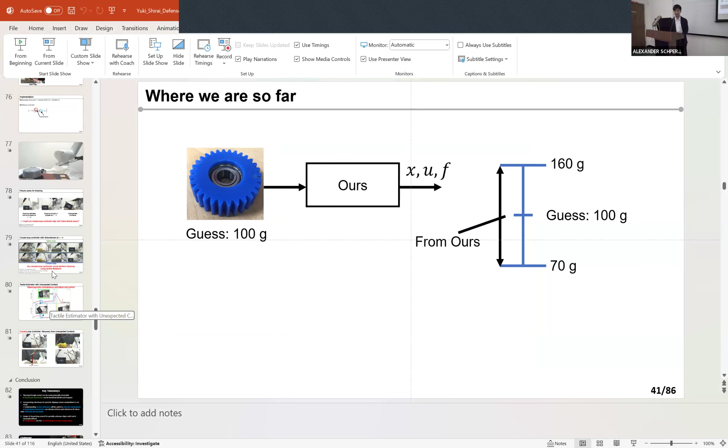So about the tactile tool manipulation, I was wondering if you didn't have the GelSight or any other vision-based tactile sensor, how would you approach the same problem without a tactile sensor? And from that answer, what do you think is the advantage of using a tactile sensor in this kind of problem? I see. That's a great question.

I know we can do it many different ways, right? Like in your lab, instead of using a visual tactile sensor, one other way would be using a 6-axis force-torque sensor at the end effector, and using such force-torque sensors, we can potentially guess if the contact is sticking or slipping. Or maybe we can also potentially estimate parameters of the object, such as mass or friction, using complementarity constraints, stuff like that.

So I'm not saying the visual tactile sensor is the only technology, but it's a very good technology. And your question is very good because maybe if we can fuse visual tactile sensors such as GelSight and force-torque sensor measurements, maybe we can design a much better estimator than what I just presented in this presentation.

Regarding your second question, I think especially GelSight would be very useful, in my opinion, to get kinematic information such as contact geometry, contact depth, contact shape, and whether the contact is sticking or slipping. I said that using a force-torque sensor you can still estimate if the contact is sticking or slipping. But in my limited experience, GelSight can be much more accurate and can detect much smaller microscopic slipping. So if you want to do super precise in-hand manipulation, using a vision sensor would be very beneficial. Yeah, that makes sense.